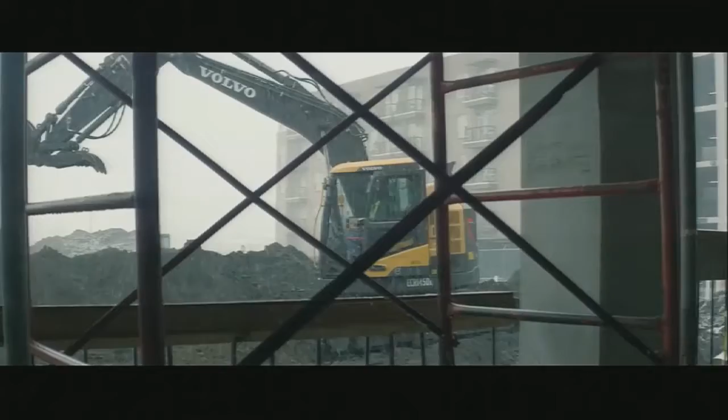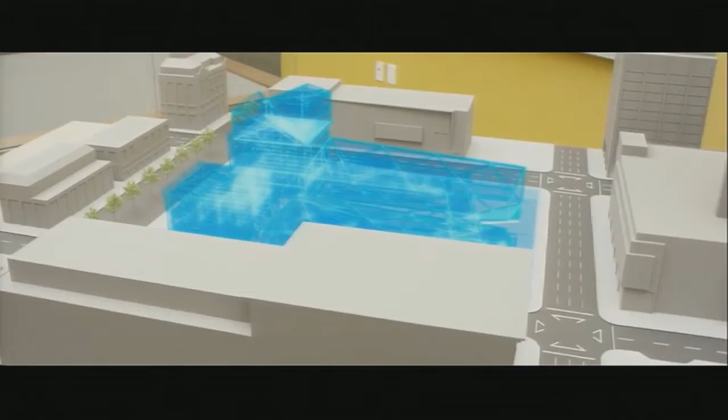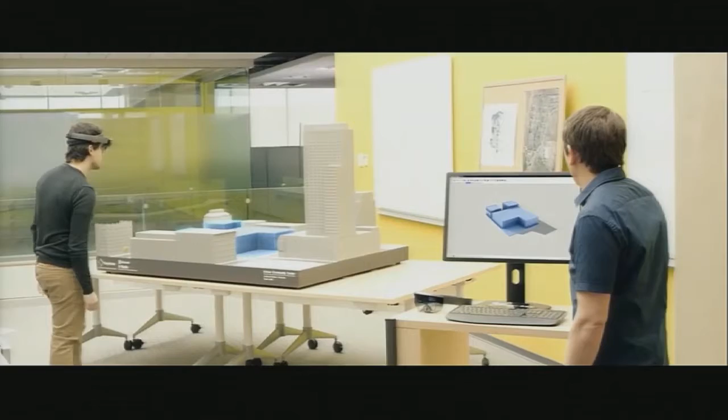It's not a utopia. We are looking for new ways, and for example, big companies like Microsoft are leading this kind of technology, offering proposals for inspect, control, holographics could be one of the ways to check new tools, to check how we are mixing these two worlds.

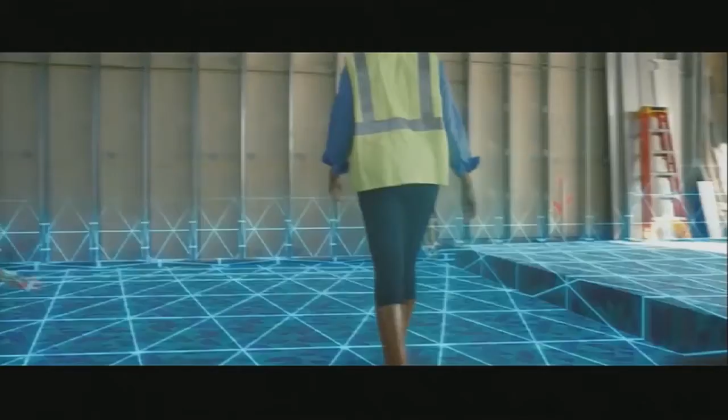This video was made to inspire some ideas, but this is real, of course. We show this to the students at the university, and we make them create projects and present them using this technology. We are doing like the previous speaker does also at universities.

We can collaborate together using this technology in the distance. This is one of the engaging ways to use this technology.

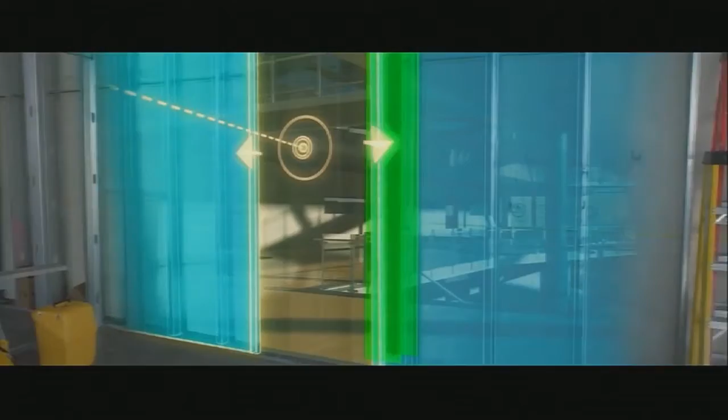We can speak with a specialist, with the operator, in the same moment, in real time, and find solutions for the building, catching this information from servers around the world, and we can work in this way.

So we know we've got a few tools. This is not the first step. Some tools like Autodesk offer to us. Companies like this are exploring possibilities, CL3VER also, new ways to show these products.

We are also creating interactive models that can be shown through these low-cost glasses, for example. We use this in class with the students. They present these projects watching through in 3D.

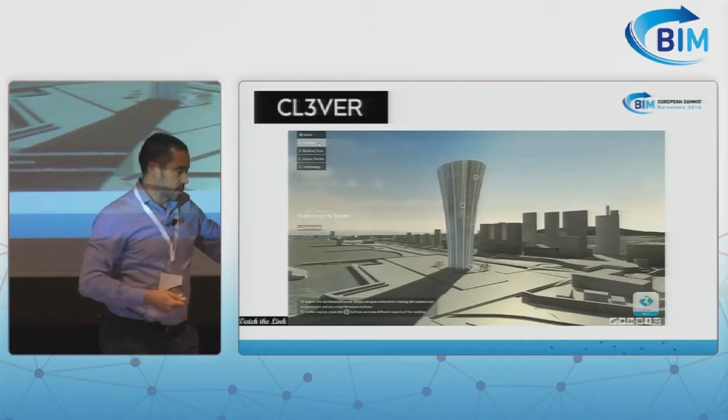Projects made with BIM. We try to mix these two worlds in one. But with this technology, we need a small explanation of what's happening, why we are focusing on this technology, because the market is headed in that direction.

It's expected that in 2016, the increase in sales in this technology will be real. Of course, big companies like Facebook, Google, all of them are investing in this kind of technology.

You know all about the Google Glass, this device. You can stay in touch with streaming video. You can go to the office, stay speaking and showing what's happening in the building process in real time, asking, interacting with the technicians and operators, and telling what is wrong, what is well done. So you can experience this.

Well, some more ideas about what devices are out there. These are all head-mounted displays, available in the market. You can buy them. This is one example, but they are more focused on virtual reality. This kind of device, like Samsung Gear, is leading this.

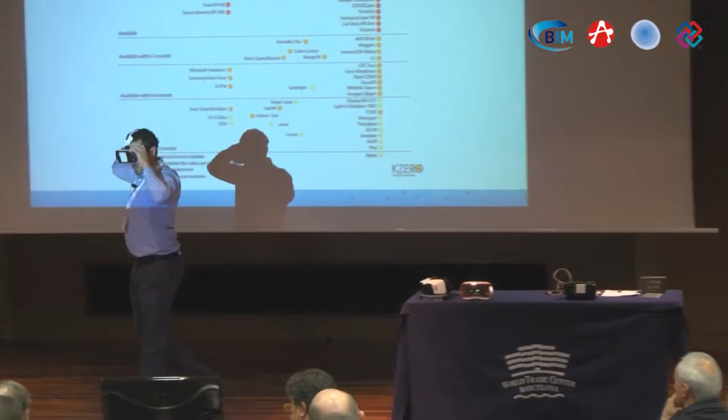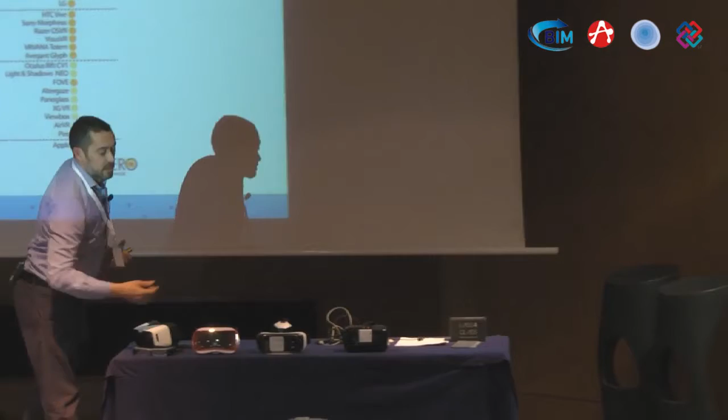So we explore in class with the students. We can interact with a model, just by watching around and clicking on a menu, looking at the building from inside. And we know that these devices are connected to servers, so we can mix these two worlds in one. Here are some examples from real projects.

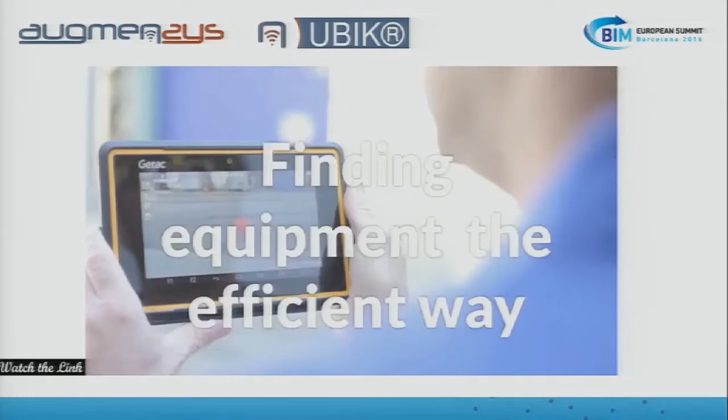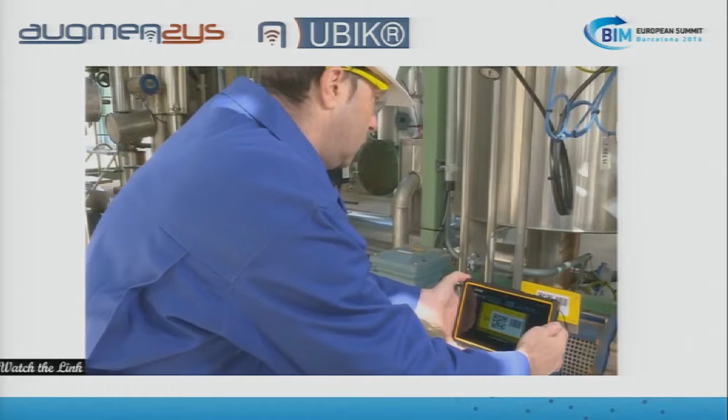Augmensys has developed a platform that connects directly several protocols. They have a solution about the security data that can be mixed. It's really complex, of course. And you can interact with the database directly from the place where you need to check something. So this database could be, in the architectural field, our BIM models, of course.

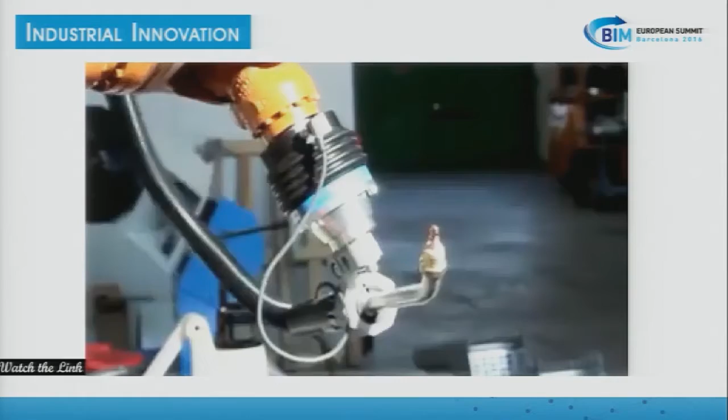For example, in maintenance, operators in maintenance and facility management need more of these technologies to improve results and make them more efficient. You can call in real time with the operator and specialists, and you can get support in real time using head-mounted displays that catch, using image recognition, some of the tools that you are managing.

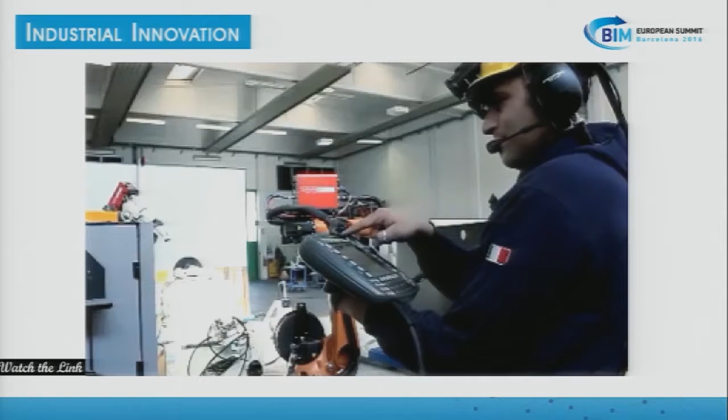In this case, we can use this kind of hardware, but we need augmented reality. Augmented reality is used with this kind of devices, see-through glasses. It's different than Samsung, for example. This one needs a phone to show the content, but this kind of device can achieve these results.

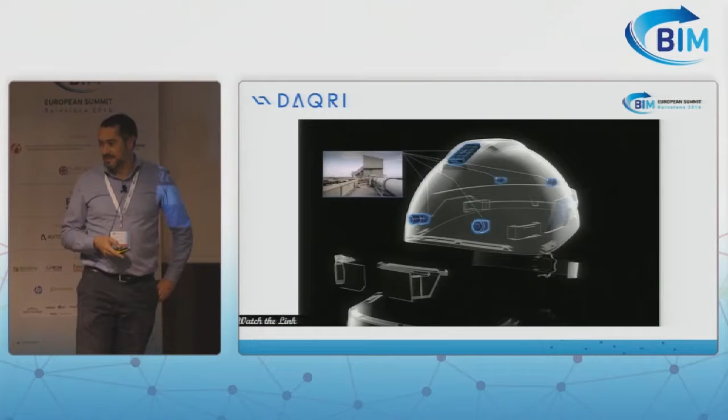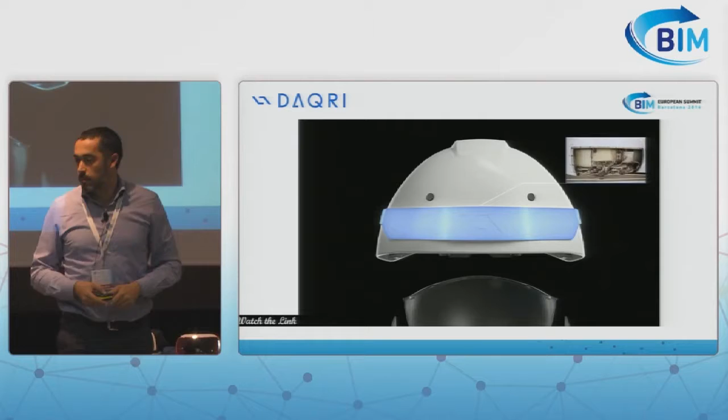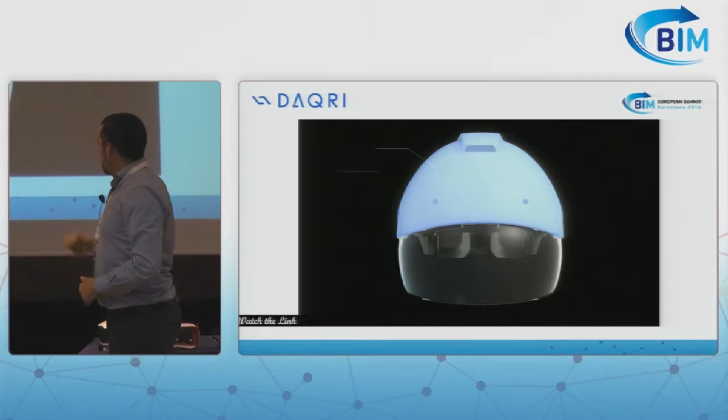Well, I need to go forward. Imagine the helmet for operators in the building of the future. This could be the future helmet in building. Well, I don't have one here, but this helmet exists. It's real. The helmet from DAQRI has been developed, and probably we will see it in Barcelona next week at the Mobile Congress. This is one of the tools we can use to test.

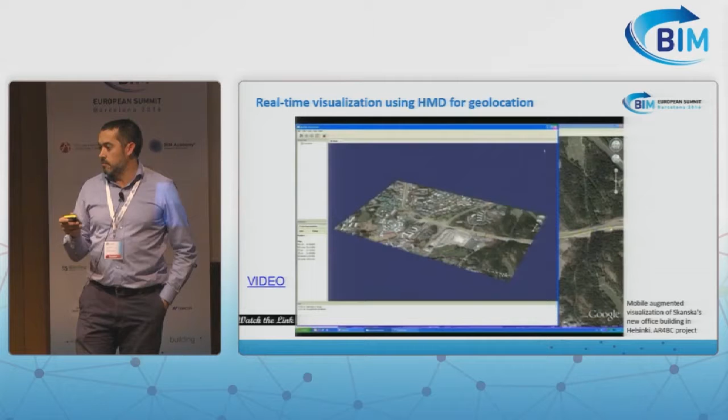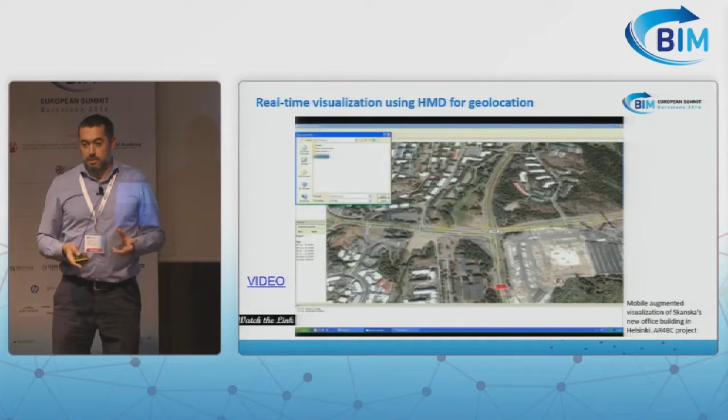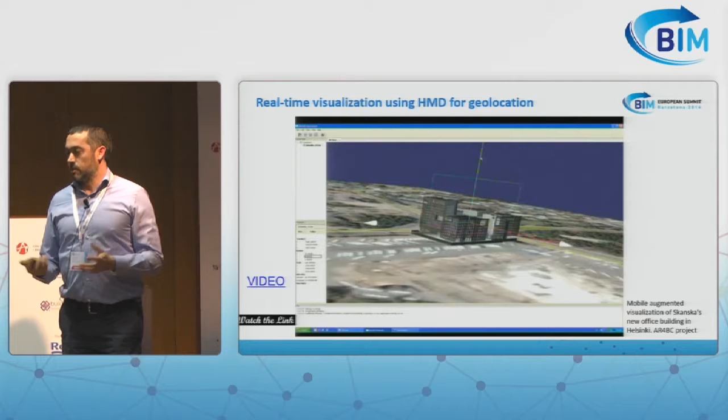Also, I need to go forward because I have a few minutes. Integration in BIM - this example was on industry, but in BIM we can place the building exactly in the map using augmented reality. So this is what we can do. We can also check if the orientation or the building concept is okay or not, just by watching the object, the building in this case, in the real world, using this kind of software.

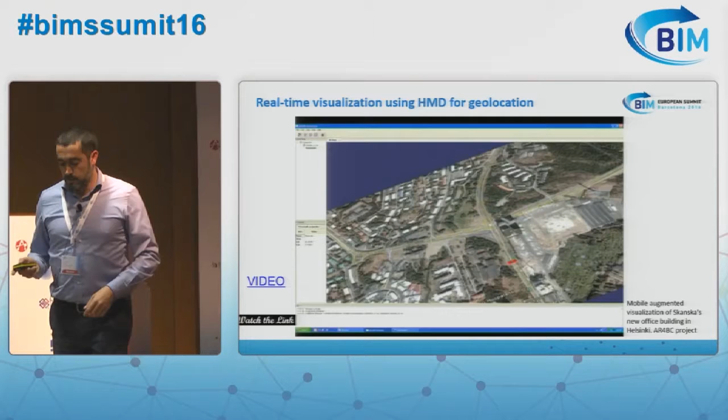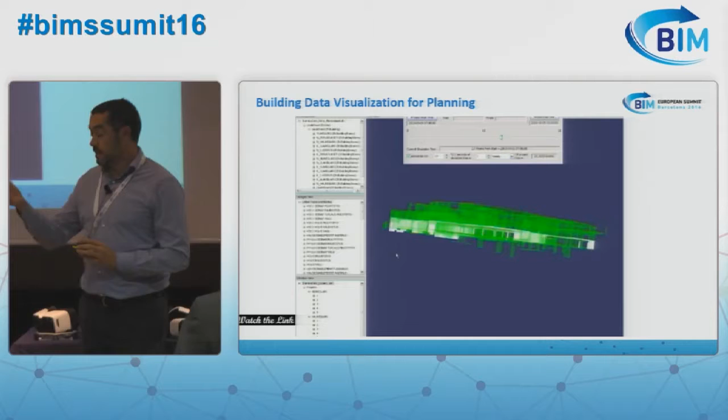Or the construction process - we can check the timing of elements that could be organized with this software. You can see in the real world, in green or red, if they are on or off, in time.

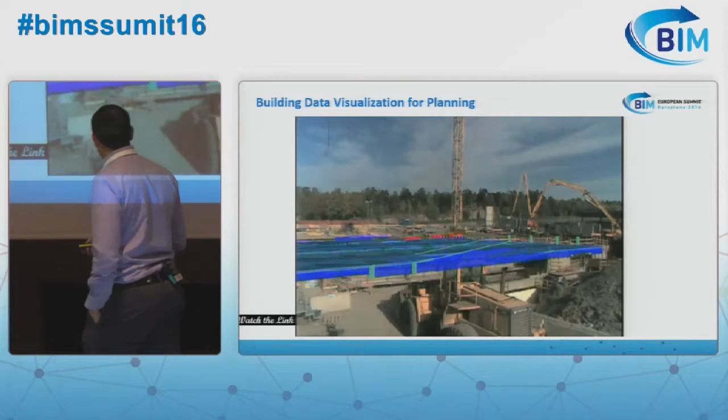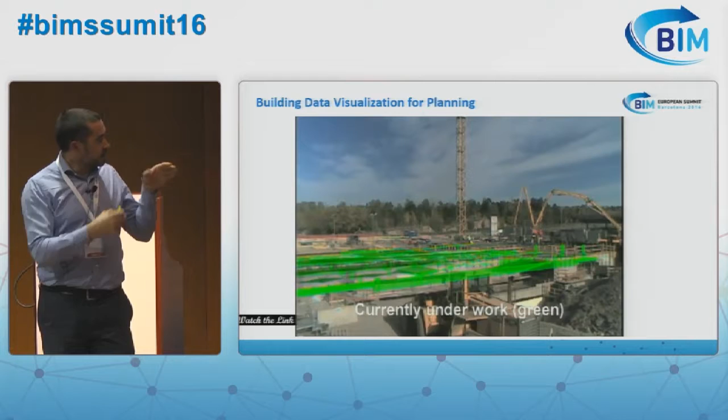I want to show you some video because of this. So here we can see with the see-through glasses what's going on, what is wrong, what you need to do and what not, and it is exactly located in the right place. You can select the date, you can select the month, and you will see what the building will be on that date.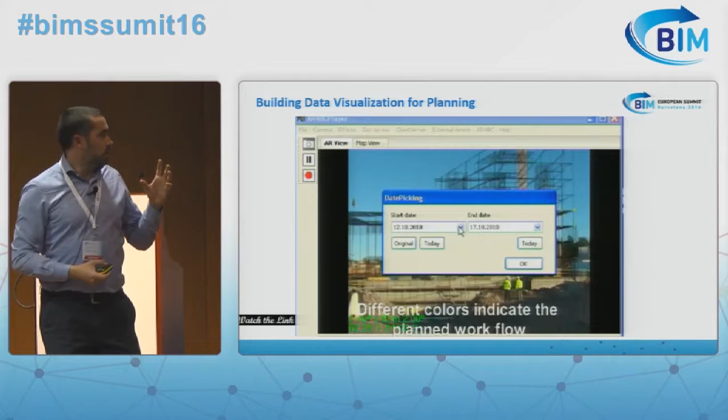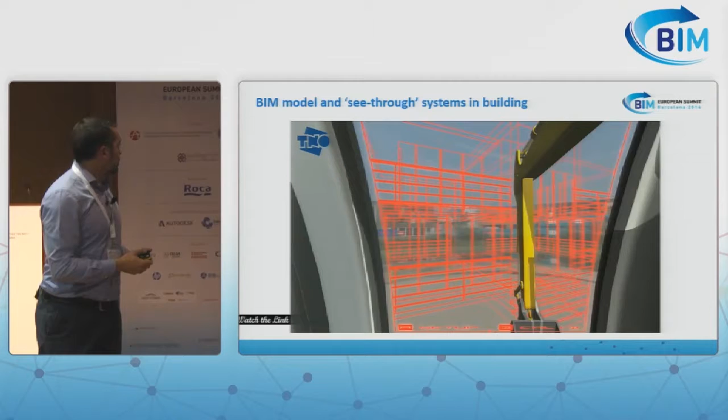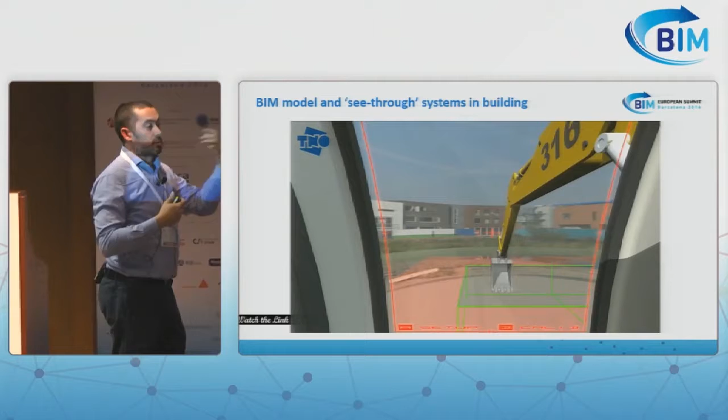Next, some other ideas are about new uses into the machines, into the trucks, into all your tools you need in the building process. You can see through the glass of the truck what you need to do. You don't need to wear glasses - you can see through the same truck.

Or maybe for maintenance, you can see on the same place and, using image recognition, see what you need to do, or where it's wrong and where you need to check something.

Some of these processes need image recognition - it's another kind of technology. We use this also in class to create the illusion that buildings are made by students in the same school. So we place buildings in a virtual exhibition inside the school using image recognition of the hall, for example. For maintenance again, watching occluded objects or objects from the system that will be there.

Okay, some more ideas. Augmented reality is here to stay, but we need to know the possibilities, of course. A little fast view of technology: glasses, of course, 360 cameras. You can see, for example, we can take a mega selfie right now. If I take a photo, you will see it on Twitter using the hashtag BIM Summit.

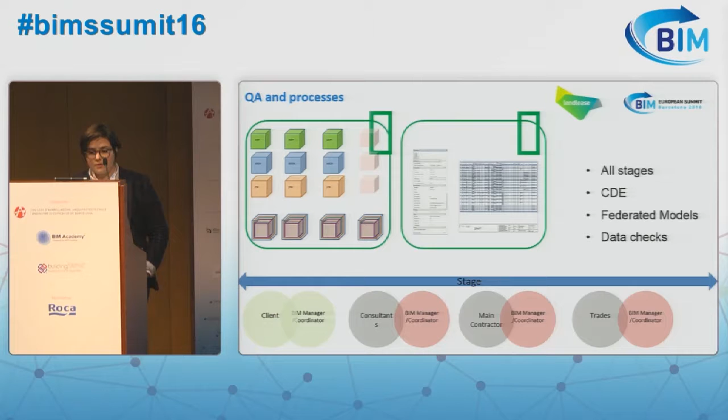This is what I do also, a lot of BIM police. So as a client, I need to check that they are delivering what we agree on. And then we go through a process of basically, in terms of using technology for collaborating, we use a common data environment to share the files, as simple as that. We basically have, in that common data environment, a process of quality assurance.

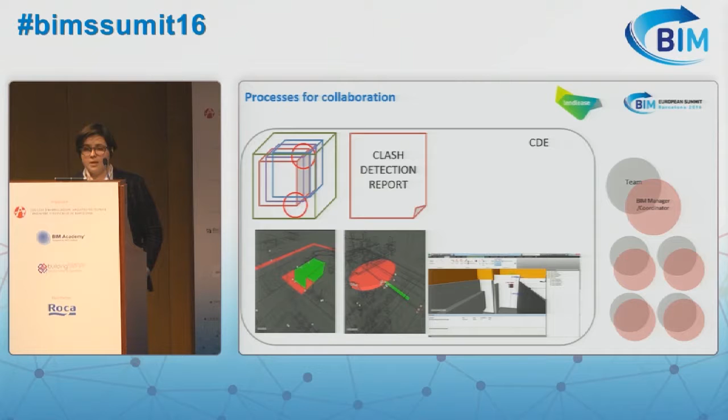And then we have this part that is, for me, the key in collaboration. I am not going to name softwares. There are tons out there, and I bet there are tons of BIM geeks here that know those softwares of collaboration. But what I will recommend is basically to meet every 2 weeks and share the files in a work in progress file on a common data environment on a weekly basis. If you leave this sharing of data for the end of a stage, forget it. You haven't collaborated, and you end up on site with the problem that we saw before.

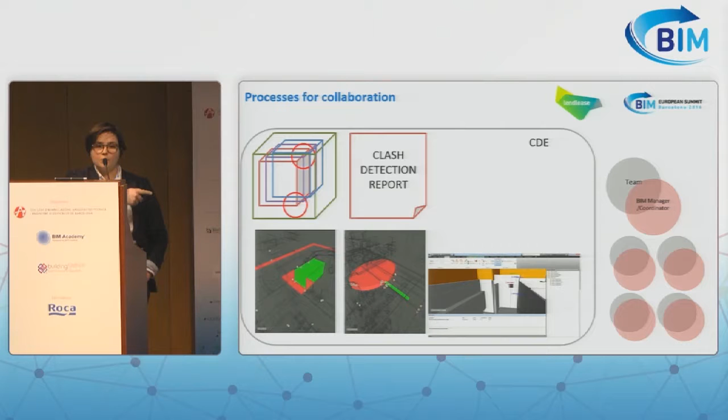You need to share these files constantly. And apart from using architects, engineers, and trades to deliver BIM projects, get everyone involved. In my company, my planners know what BIM is, what 4D is, what a software like Synchro does. We have bi-weekly meetings where we check our 4D models, because it's not BIM geeks doing the BIM work. It's a company implementing BIM. It's collaboration within your whole company.

Same for the cost planner. My cost planners might not know what 5D or COBie is, or how to create a parameter that extracts the quantification. But they know that I can do it, and we work with that. So the implementation goes top to bottom. Someone told them, hey, we have an expert here that can help you with this tool to be better. And they come to me and ask me how.

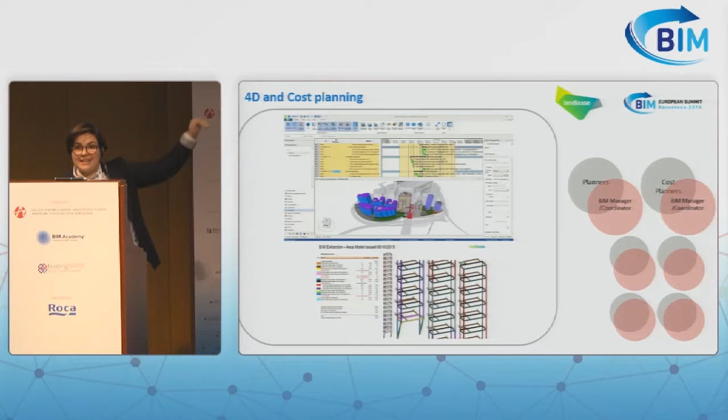We have bi-weekly meetings where regularly they would check 2D, or just a Gantt chart, and now we check this kind of software. And then you end up with something like this. These are not BIM coordinators, these are not BIM managers. BIM, as my boss says, is 80% people, 20% technology. If you don't change minds, you will not get to this. You'll just have someone like me doing something in a corner, and that will not give you the return on investment you want as a company.

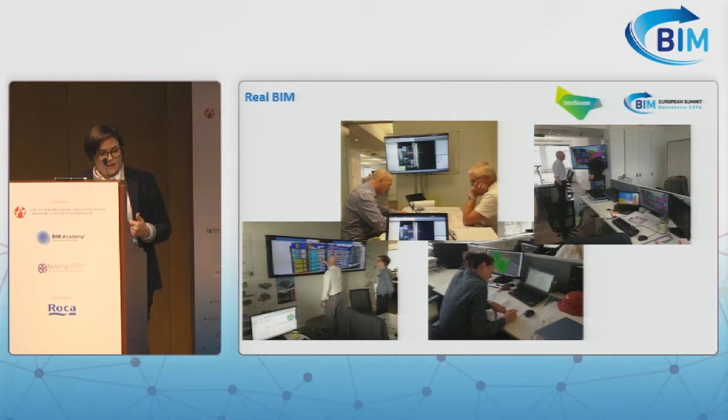I think I'll run out of time, but I'll live with this. I think it's as simple as this: companies analyze the risk in innovation, but I invite any corporation to analyze the risk in not innovating. In 10 years, if the construction industry doesn't change, as Fred Miles said the other day, Amazon will come and deliver houses faster, more efficiently, and cheaper than the construction industry does. Thank you.

Okay, hi, is this finding me? Tim Broyd, you've probably seen me earlier. I think I like that last comment actually—the way I've heard it put before is, if you think innovation is risky, try the alternative.

Here I am, you're down to the last two speakers. Hooray, keep going—we're half an hour late, then we're thrown out. So I've got, gosh, I'm tied down to 12 minutes.

I really must rush. Tim Broyd—about 3 years ago I changed from a career in industry, my last 20 years of which was as corporate innovation director in a couple of large global engineering design consultancies, to go to University College London, where I'm professor of two things. The honorary one means I don't get paid, but it's built environment foresight. I get paid for civil engineering. I'm also the next president of the Institution of Civil Engineers.

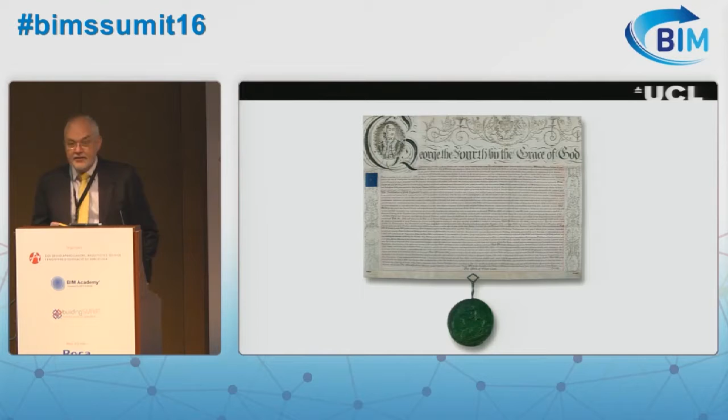That is our initial Royal Charter. It hangs in the President's office. Anyone who thinks they know things about Royal Charters in the UK and wonders why the seal at the bottom is green and not red, see me afterwards.

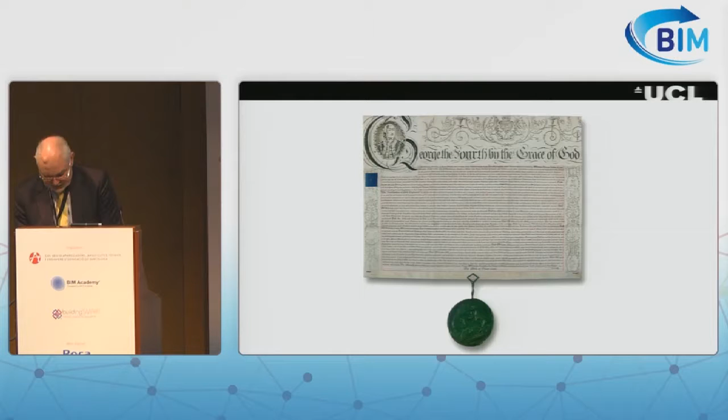We've heard enough, I think, about the BIM task group today from the UK, which essentially says that by not very long from now, all central government funded projects should be undertaken within a BIM level 2 environment, and by October - this is an addendum to that - we ought to have some information about quality of information, etc.

The BIM Action Group was set up, without arrogance really, by my instigation, to find a way for the ICE to take the message to civil engineers. At the time, in 2011, 2012, there was a lot of feeling and bad feeling in the ICE amongst civil engineers that BIM was about building, and therefore not for us.

When we got that message going through, they then started saying we therefore need a BRIM, a Bridge Information Modelling System. We need a HIM, a Highways Information Modelling System. We need a RIM for railways, and we need whatever for water. We're through that now, but we're there really to help the government develop its strategy and to take the message out to engineers.

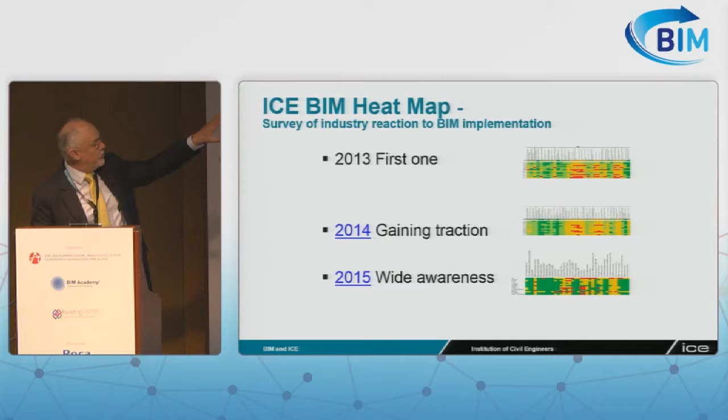Just a flavour of some of the things we're doing. We've had an annual heat map - this is an awareness and activity map in BIM over the last 3 years. If you look on the right, note that there's hopefully more red at the top than there is at the bottom. I'll explain that on the next slide.

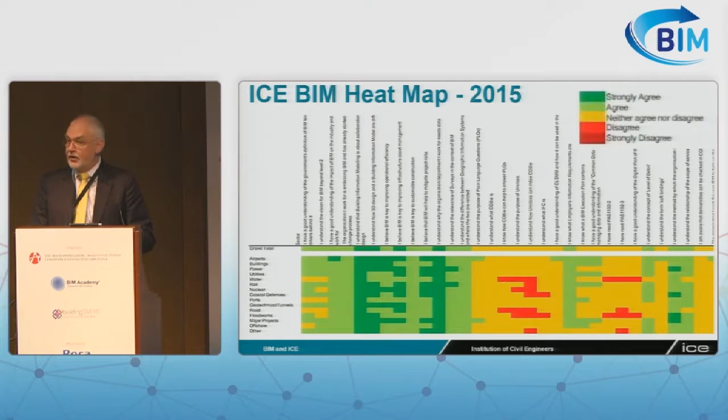Effectively, what you have at the bottom here is a whole set of different sectors of civil engineering, and along the top, a whole set of types of activity and attribute, etc. What we're mapping through questionnaires is the degree of awareness, understanding and implementation in these various areas. The key on the top right says dark green is good - people are strongly agreeing with premises such as 'I know what this is', 'I do it well', etc. Red is pretty bad - I totally disagree with those sorts of statements, etc. By doing these sorts of things, we're increasingly able to understand where the knowledge gaps are, and we can then start to do things to fill them.

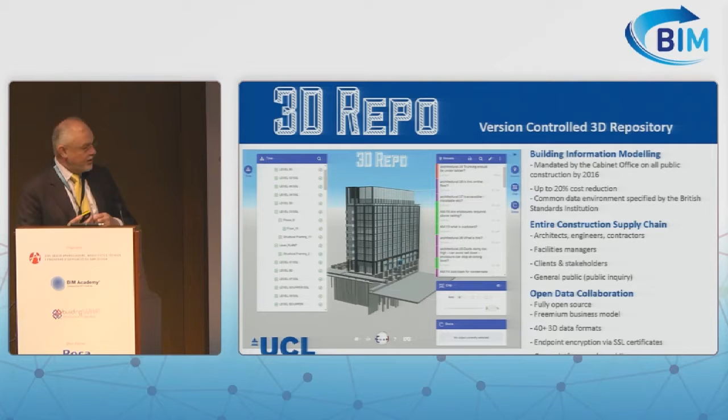I'm going to end over the last - I've got 4 slides left, 2 slides in each of 2 things. It's not always, as we know, it's not always the big boys in software who come up with the exciting ideas. Now, UCL has chosen not to have a business school - it does its stuff through its faculties. So here are just a couple of examples of very recent spin-off companies that have come out of UCL.

One is 3D Repo, a version-controlled 3D repository, which is winning a number of prizes for its initial activity. And the other one, Basestone, a tablet and web-based collaboration tool, which is connecting people and drawings, particularly in the very important aspect of drawing reviews, in ways that some of the bigger software outfits don't seem to be managing to. That, again, has been taken up with a big reference sale, wide-scale use on Crossrail, and also - if you know about things like Techstars, which I'm told is the world's largest non-Silicon Valley accelerator for startups - it's winning a lot of stuff and a lot of plaudits through them.

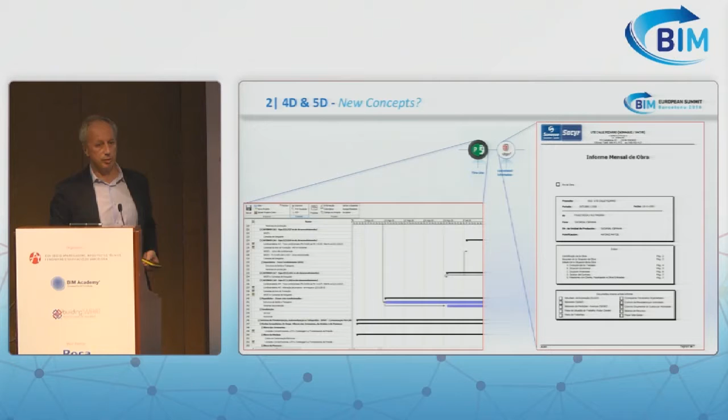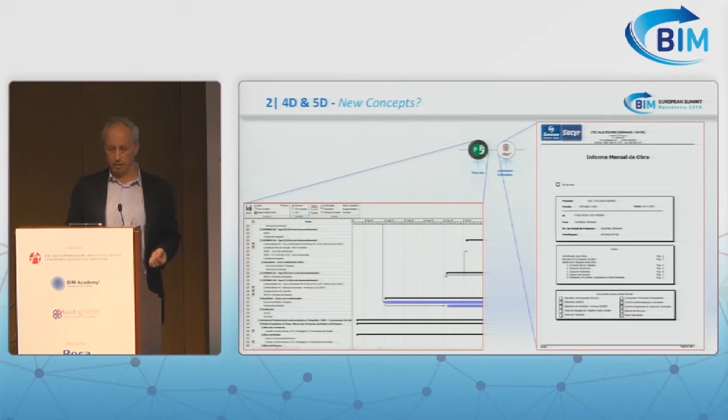I can show that detail there—that's the monthly report that Sacyr generates, which has 7 pages with a lot of information about what goes on in the construction site for that particular project. It covers work progress, costs, budget control, the relation with your client, the financial status, the advance of the works. It's a lot of things, not only modeling and what we've been talking about. There's a lot of stuff, and some is pretty boring, but you have to do it. You have these kinds of maps and reports. This is just to show how much information you can get from these things, and this needs to be done.

In Sacyr, we are organized in processes. That's the basis of our functioning. I'm a suspect here because I'm a process guy, and that's what I do. But it's true that it's pretty much the way the company is organized. You have the normal processes of a construction company, and these processes are detailed in procedures that specify what you have to do, and in each step, what your inputs are and what your outputs are.

For us, this challenge of BIM as a construction company is to go through these processes and in each one try to analyze and define new ways of working. For instance, in the tendering process, are the people who do tendering ready to receive a 3D model from the client and work on it? Probably not. They need to be trained. There are new tools to work on.

In the procurement process, when you're on a construction site, how are you going to ask for stuff from the headquarters? Does the person at headquarters have access to a model, and are they going to check on the model? It changes a lot, and it changes all the processes, not only the technical ones. We hear all about the technical processes, but there's an administrative process that also changes a lot, and that's our concern. Our view is that you have to go through these processes one by one and see what differences you need to implement in order to follow the new tools and the new philosophy of BIM.

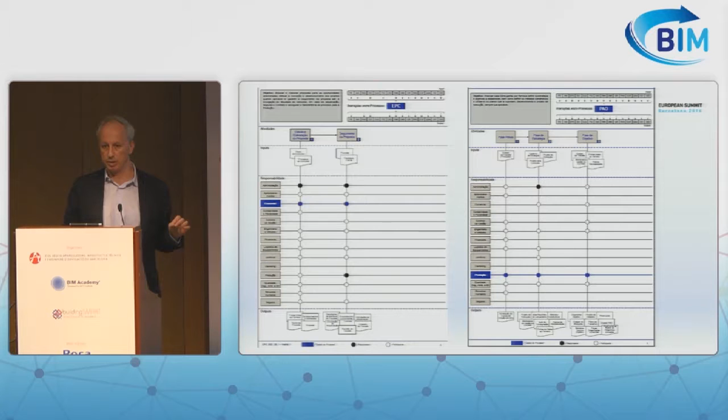Going through this architecture a little bit, Sligo is an application that we developed for 20 years now. And it's been running for 20 years, so it must be nice, because otherwise it would be gone now. And it's still going on, and it's still evolving, and I think in a very nice way.

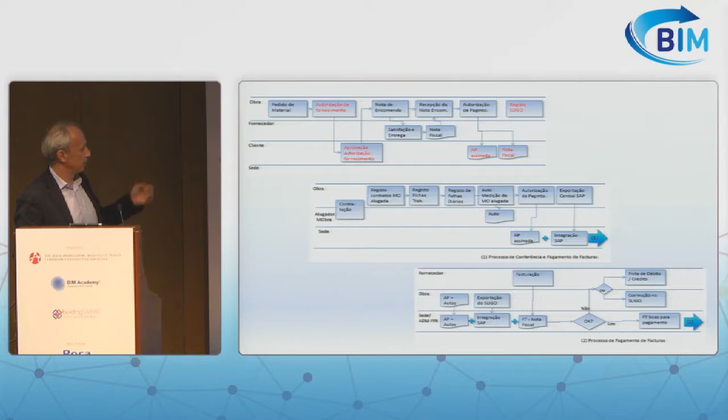These are processes, I'll skip this. This is just to see the detail of the process in the sites. This is just an image to see how many transactions we have just in the material module. You have a lot of things to deal with.

And that's what it seems that people forget about. You cannot forget, I mean, to manage just the material part, you have to manage warehouse, you have a lot of things to do, and the applications must be very robust and very well done to support all these processes.

It's not just like putting in some information, there's a lot of detail. You have to return things to your supplier, that has an accounting impact, something is going to happen in the accounting stuff. So these are complex systems and complex processes that you cannot forget exist.

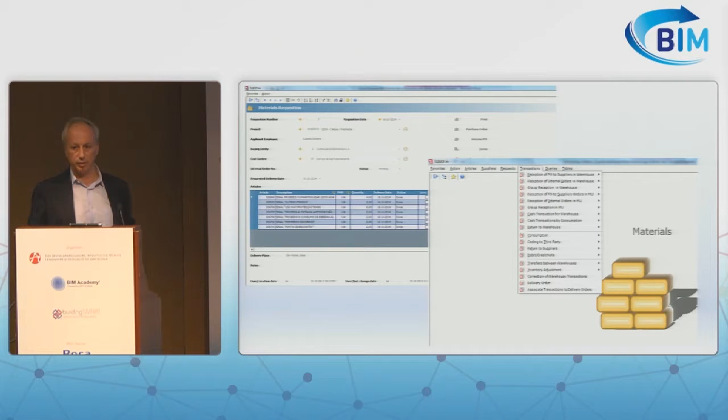This is pretty much the way Sligo works. You define your budget, then you define what we call management units, which is a cost structure. And then you have the monthly sort of cycle.

When you are doing your resource consumption, you are costing your project. So what the administrative people do during the month is type in all the resource consumption that are happening in your site, and making resource consumption is, for us, costing our project.

Then normally at the end of the month, you're going to type in the production you did. You're going to tell Sligo how much of each activity you have produced, and that gives you the ability to generate the expected costs. Then budget control is comparing the expected costs generated by the budget with the actual costs registered on Sligo.

What you're doing in a construction site, we do everywhere. My company has activity in Angola, Mozambique, Brazil, Portugal, Ireland, Cape Verde, and everyone uses the same systems and the same processes. So this is valid everywhere this works, and it's not easy, but you have to keep doing this.

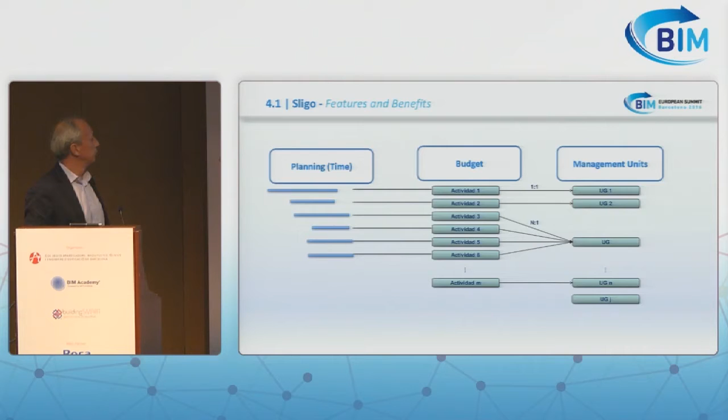We have other applications, and the philosophy is the same. For us, the challenge is to integrate these new tools with the tools that we have. I think it's probably the same challenge for every company, because you cannot just think now we have a new thing and this is the next big thing, and forget the rest. So the challenge is that you have to use the things you have. Of course, it's a nice opportunity to do new stuff if you want to. But you have to integrate the systems you have with these new tools and this new philosophy of BIM.

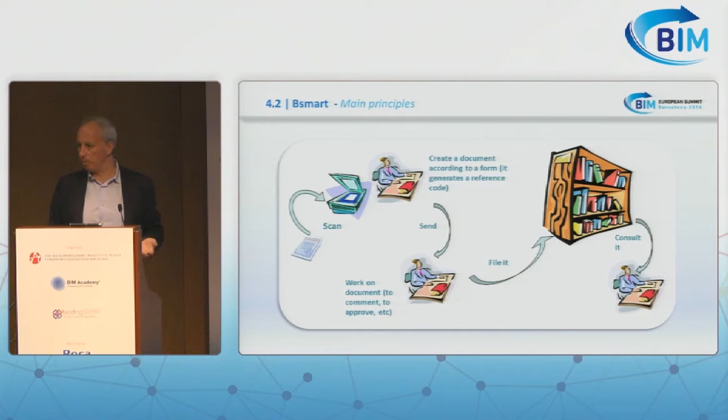BSmart is a document management tool that we have. It does the usual thing: you scan, you have workflows, then you file it, and you have permissions to consult any paper that you have there. And this is a real case of integration that we did on a construction site in Portugal, in Lisbon.

This example is related to clarification that you need to have with your client, for instance, or the architect. You have some doubts, and you're going to write a memo, a Word file, and send it as a PDF file. Where are you going to keep that PDF file or that Word file? For us, you're going to keep it in our documentation application, of course. It's there, and it works, and that's the way to do it.

If you have a file, you want to file it, where are you going to do it? In BSmart. So what we did, and keep doing, is relate the information—this type of form code, the complete history tracking, the normal advantages of a management tool. But then what we did was relate things. So in this example, you have a clarification form that you send to your architect or owner, and you keep it in your BSmart document management application, and then you're going to reference this with a link in your model.

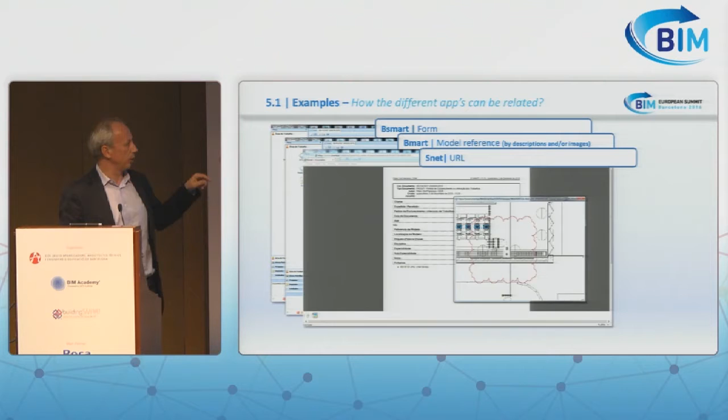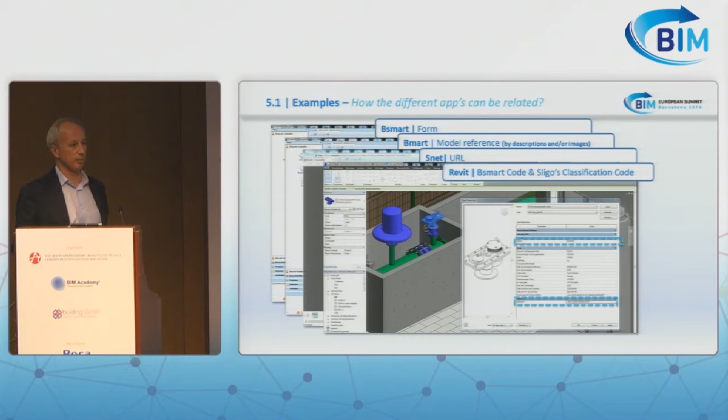So what you have in our model is the code of that document that you send to your client, because it doesn't make sense for us to keep that Word document anywhere else than our document management tool. This is pretty much what I want to say: you cannot forget the rest, and what you need to do is look at your processes and integrate them, and get all the systems talking to each other. This is now in Revit—we use Revit, and you have references to the documents you sent.

Risk management is another tool that we use. It's another complicated process—really complicated. We did this on our own, so we know how complicated it is. This is complex. We developed this application, did our functional design, talked to everyone, and then we developed it. It's quite complicated.

People type in what they think about. It has some metrics—there's a lot of things, and you cannot just skip this. So what should you do? You should reference stuff—reference in your model that you have this risk, and connect the data structures that you need. This is our vision of what you need to do.

So just wrapping up: if you take your processes and your applications, you get what we call our BIM. For us, BIM is all this—it's not like a big ball with BIM in it and nothing else. You have to interrelate all the information, and that's what we're doing. That's our vision of this.